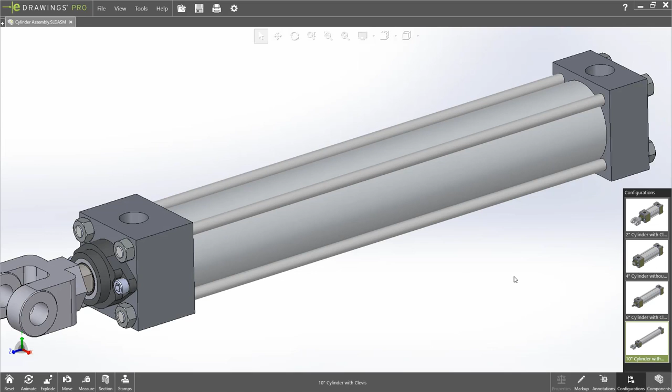Viewing configuration data has always been available for exported EPRT and EASM files. Now with eDrawings 2019, configuration data can be viewed for native SOLIDWORKS part and assembly files, saving the step of exporting the data to eDrawings format.

Sharing CAD data from eDrawings is a great way to collaborate, and with the new WebHTML output, eDrawings models can be shared in a new format that opens in any browser without the need for extensions or installation. Familiar tools are available, such as access to the component tree, and configurations that exist in the model can be displayed.

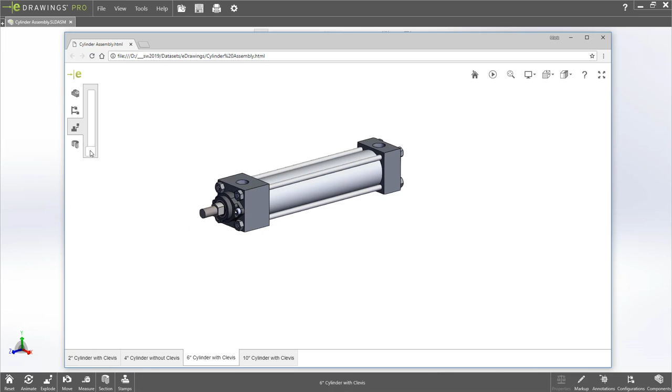A handy Explode tool is available to see parts contained in an assembly. And sectioning allows better visualization of internal components. All of the eDrawings viewing tools are available, such as View Animation, Standard Views, and Model Display. Ambient occlusion can be turned on as well for added realism when viewing models.

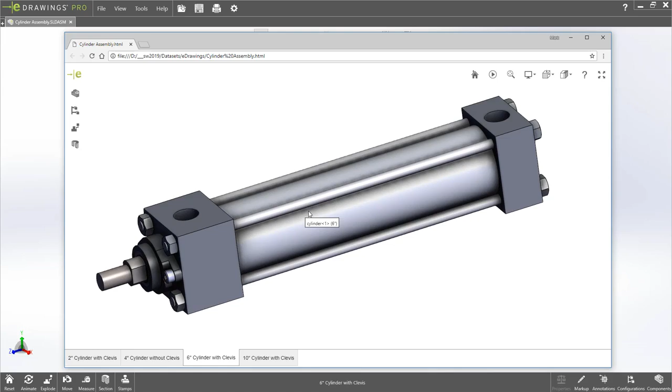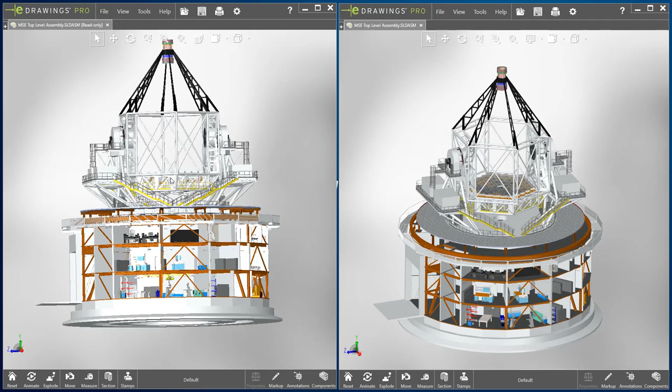And finally, performance in eDrawings 2019 gets a big boost. On the left is eDrawings 2018, and on the right is eDrawings 2019. As we rotate the observatory assembly in eDrawings 2018, you can notice there is a bit of delay before the assembly catches up to the mouse, and you'll notice that some of the smaller details in the lower floors get removed.

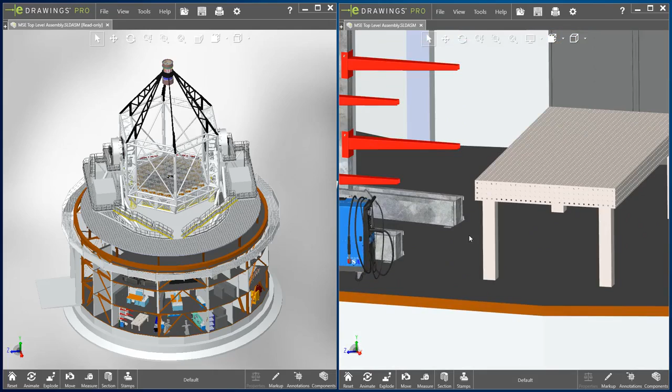This removal of detail during rotation is done by design to help speed view manipulation, but comes at the expense of visual appeal. In eDrawings 2019, when rotating the same assembly, you can see that there is no noticeable delay, and the smaller details on the lower floors remain. All of the view manipulations feel immediate and effortless, and the same goes for component selection, providing a much better user experience when viewing very large assemblies.

eDrawings 2019 extends its capabilities to view more CAD file types, offers better sharing through the new WebHTML output, and provides a big performance boost when viewing large assemblies.